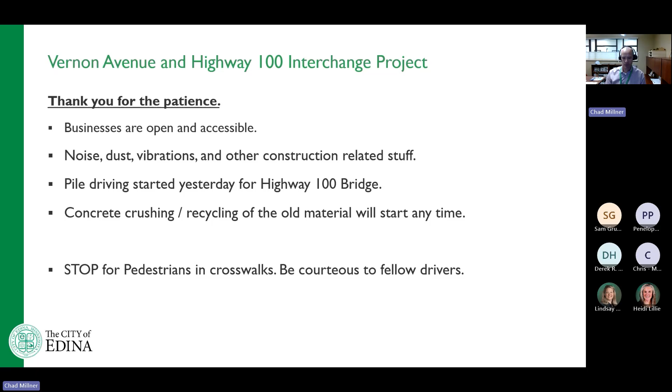These are the project goals, which I share at every one of these meetings. It's really to improve safety and mobility of all users, create new separated pedestrian routes, improve traffic operations, and all the other bullet points on there.

The schedule, we're still on schedule. Nothing has changed substantially from that completion date of November 15th, 2025. If anything changes, we'll be communicating that on the website and at these meetings.

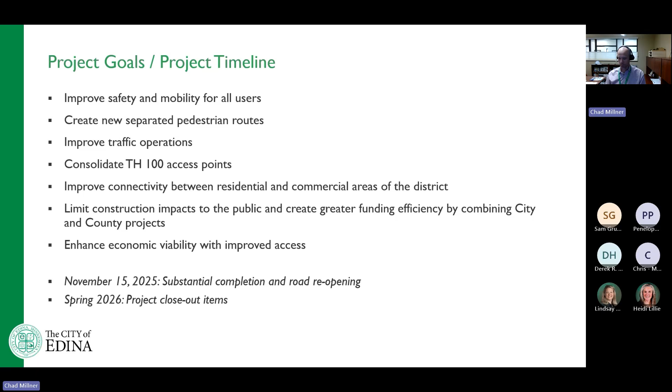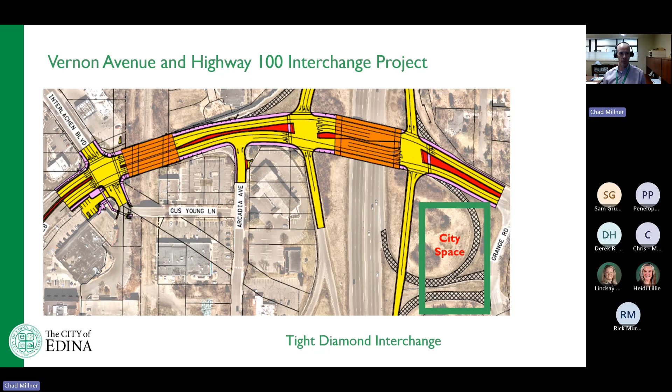This is just an overview graphic of the project. I share that every time so people know it starts west of Interlachen Boulevard and goes over to Grange Road on the east side near City Hall. It ties into the project we completed last year. Two new bridges, one over Highway 100 and one over the CPKC Railroad, with new lane configurations, additional left turns, additional wide sidewalks on both sides of the facility, and new on and off ramps to Highway 100, consolidating those access points and removing the conflict points with all the existing on and offs for the highway.

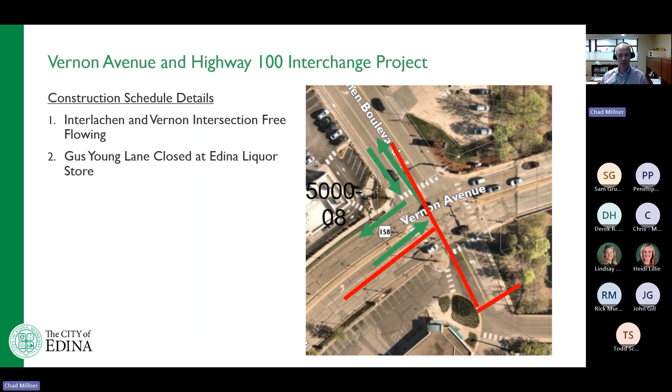What's occurred the last few weeks? This is a picture looking towards Davanni's, with Edina Liquor in the background, so you're looking to the west. This is where the Vernon Avenue Bridge over the rail line used to be, and it is gone. This is a current day picture of that site as they prep for the new bridge.

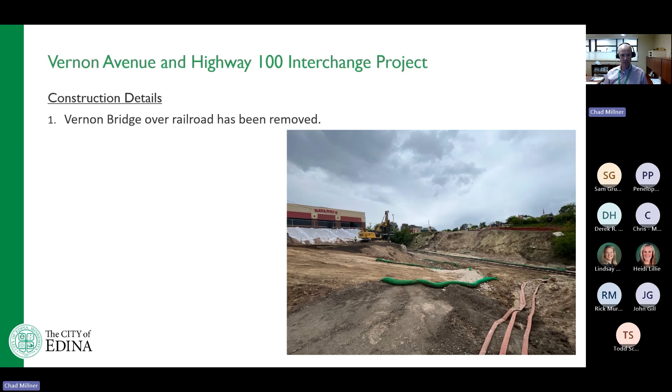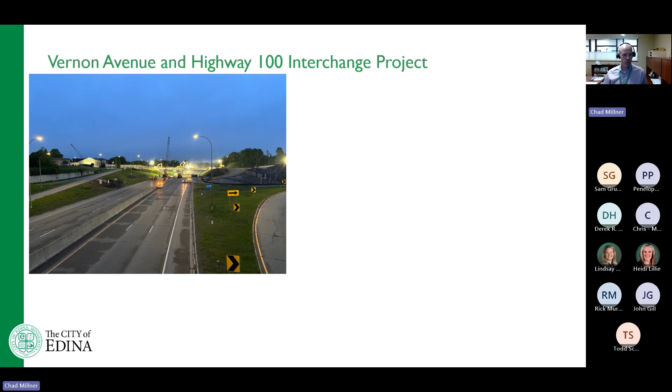We also removed the Highway 100 bridge. This is a picture taken at 5 in the morning on that Saturday of the weekend closure, showing all the operations with no traffic on the highway. Here's some aerial drone footage from that Saturday of the bridge demo, some pretty cool photos. The one on the left is directly over operations, and the one on the right shows a panned out view of that Saturday work during the closure.

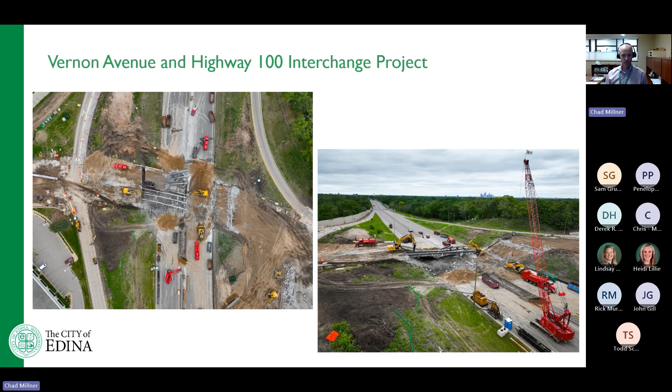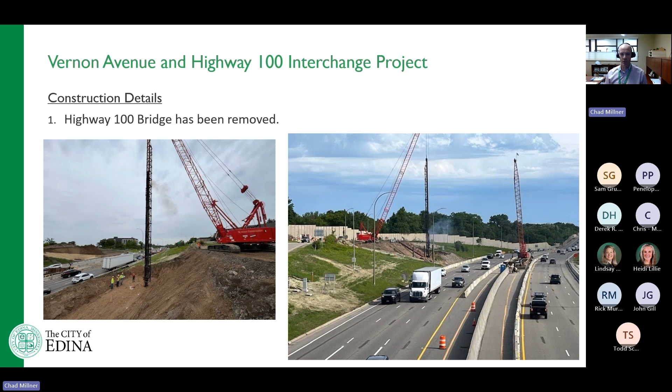The photo on the right is again taken from probably Eden Avenue. You can see that pile driving equipment there on the west side of the highway, and another crane in the center where they can access that area to keep working on the stuff to support the bridge in the middle of Highway 100. Some pretty cool photos here.

We want to provide some updates on construction details and traffic information. The Highway 100 weekend closure - the north limits of that closure were changed and adjusted by MnDOT without notice to the city, so all the maps we provided were not right. The north limits were different. Instead of being able to access between 394 southbound to Excelsior Boulevard, they closed it at 394.

I got emails during the day on Saturday about that closure, brought up Google Maps, and sure enough it was closed. We also been seeing some non-project related lane closures. Tuesday morning of this week, 100 was down to one lane, creating some major traffic backups. That was a different MnDOT operations group, and the on-site MnDOT staff were unaware of that - we're trying to track down the details.

So Edina, we are asking for better communication between the project partners - at least give us some warnings so we can communicate that out to the traveling public, and make sure our maps are correct when we do these detour routes and closures. We've shared that with our project team and think that's going to be better going forward. But that's what occurred when the communications were different from what we were telling you prior to the closure, and then even these ones we didn't even know about on Tuesday morning. So we're trying to track that down and have those details available.

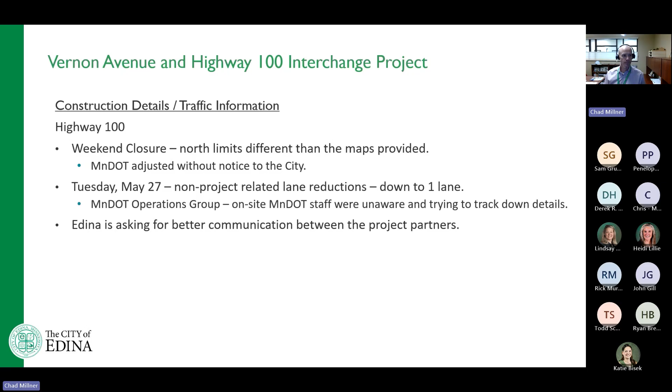Other comments - again, the crosswalk with flashing lights at Eden Avenue at the Avidor continues to have pedestrians crossing there. Continue to be courteous to them. If the flashing lights are on, it's required you stop for pedestrians. I would offer, if you're a pedestrian and you don't feel comfortable, use the traffic signal at Vernon - that's a hard stop of traffic there, and it's not that far away.

There is some sightline issue around the curve that we've tried to address four years ago with that property owner, and they were not willing to give us easements to fix that sightline. So we have advanced flashing lights coming - they're on order, and as soon as they come they'll be installed. But right now it's just the flashers right at the crosswalk. We have additional crosswalks at Our Lady of Grace Church and School - be careful there, school will be out very soon.

We understand there's cars parking on the west side of Wilson Road, south of Eden Avenue. We've restricted that parking starting today - there was a safety issue there. We restricted it until the road is restriped. We're going to grind up the pavement markings and restripe it with an adjusted center line, shift it over, and a new parking lane. That'll provide better clarification on operations for cars going north and south on Wilson Road. Again, stop for pedestrians in the crosswalks and be courteous to fellow drivers.

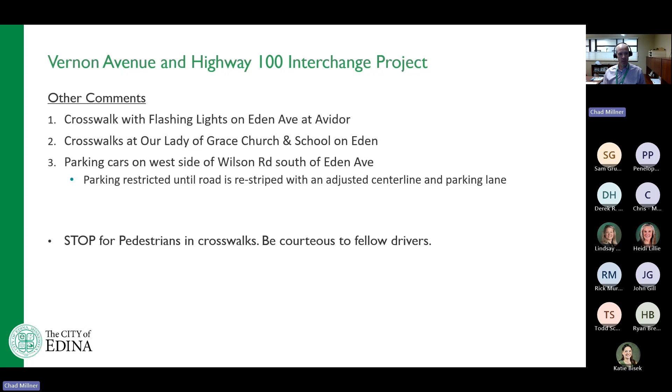Some more pictures - I think it's interesting if you're not right there, you can't see what's happening on the project. You're looking west in both of these views. You can see the Holiday gas station way in the background. They're both basically at the same location next to Hawthorne Court and those Hawthorne apartments. They're building footings for retaining walls, and that retaining wall will support the noise wall that was removed, so the noise wall will be on top of those retaining walls. The one on the left is excavation and compaction; the one on the right, they're getting ready to pour - you can see all the rebar in there.